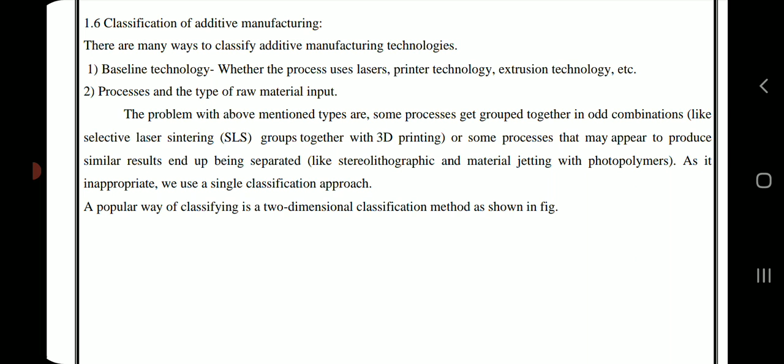As this is inappropriate, we use a single classification approach. A popular way of classifying is a two-dimensional classification method, as shown in the figure.

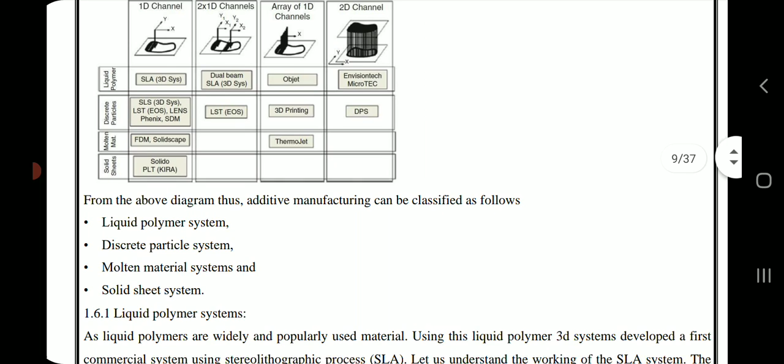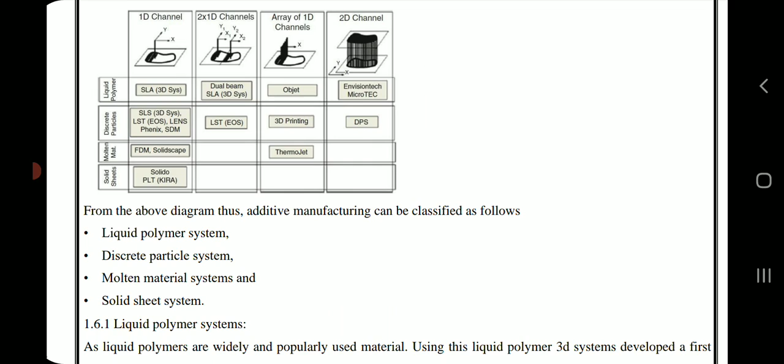From the above figure diagram, additive manufacturing can be classified as follows: liquid polymer systems, discrete particle systems, molten material systems, and solid sheet systems.

Liquid polymer systems: liquid polymers are a widely and popularly used material. Using this liquid polymer, 3D Systems developed the first commercial system using the stereolithographic process.

Let us understand the working of the SLA system. The detailed working principle of SLA is explained below.

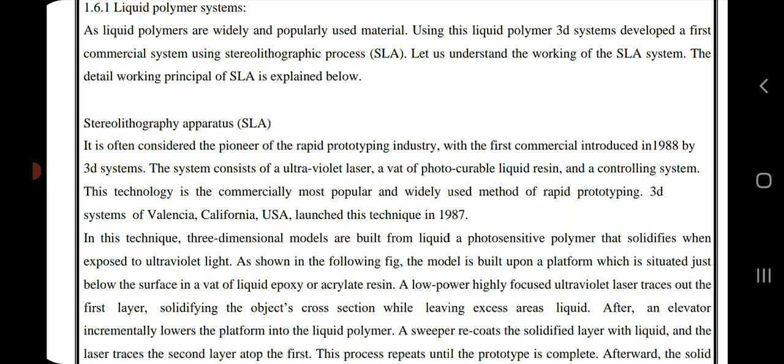Stereolithography apparatus, SLA. It is often considered the pioneer of the rapid prototyping industry, with the first commercial system introduced in 1988 by 3D Systems.

The system consists of an ultraviolet laser, a vat of photocurable liquid resin, and a controlling system.

This technology is the commercially most popular and widely used method of rapid prototyping. 3D Systems of Valencia, California, USA launched this technique in 1987.

In this technique, three-dimensional models are built from liquid, a photosensitive polymer that solidifies when exposed to ultraviolet light.

As shown in the following figure, the model is built upon a platform which is situated just below the surface in a vat of liquid epoxy or acrylate resin.

A low power, highly focused ultraviolet laser traces out the first layer, solidifying the object's cross section while leaving excess areas liquid.

After an elevator incrementally lowers the platform into the liquid polymer, a sweeper recoats the solidified layer with liquid, and the laser traces the second layer atop the first.

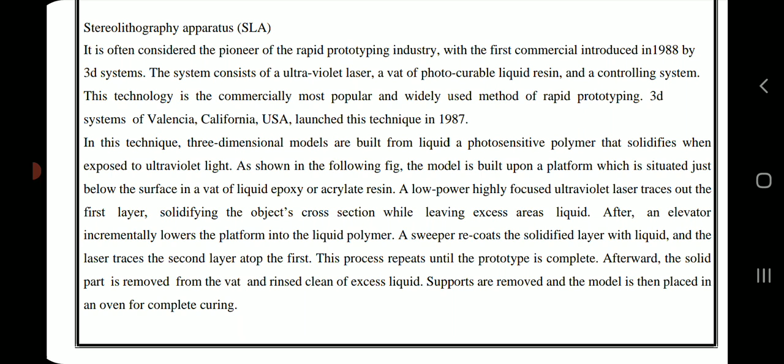Afterward, the solid part is removed from the vat and rinsed clean of excess liquid. Supports are removed and the model is then placed in an oven for complete curing.

Advantages: the SLA process builds complex geometry parts which cannot be produced by a conventional manufacturing process. High quality surface finish can be achieved, and a clear model with good resolution can be achieved.

Applications: it is used to produce parts with very fine features and high quality visualization models, fit and functional parts for assembly, and models used for flow visualization and stress analysis.

It is used for manufacturing medical models and for manufacturing parts for tooling and vacuum casting.

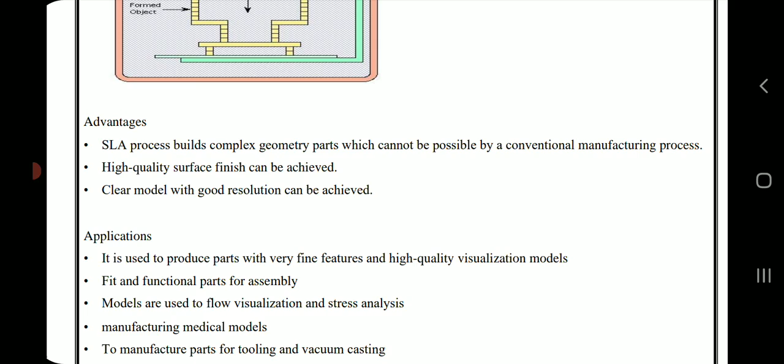Discrete particle systems, also known as powder based systems. Here, powders are graded into a uniform particle size and shape with narrow size distribution.

Finer particles are better and give good results; if too small powders are used, then controlling the distribution and dispersion of particles becomes difficult.

In 1D approach, using a laser we produce thermal energy in a controlled manner so the temperature increases to melt the powder.

The polymer powders used should exhibit thermoelastic behavior so that they can be melted and remelted to permit bonding of one layer to another.

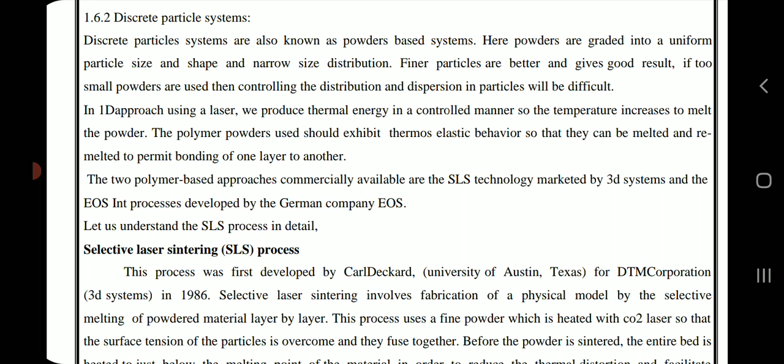The two polymer based approaches commercially available are the SLS technology marketed by 3D Systems and the EOS process developed by the German company EOS. Let us understand the SLS process in detail.

Selective laser sintering, SLS, process. This process was first developed by Carl Deckard at the University of Austin, Texas, for DTM Corporation, later 3D Systems, in 1986.

Selective laser sintering involves fabrication of a physical model by the selective melting of powdered material layer by layer.

This process uses a fine powder which is heated with a carbon dioxide laser so that the surface tension of the particles is overcome and they fuse together.

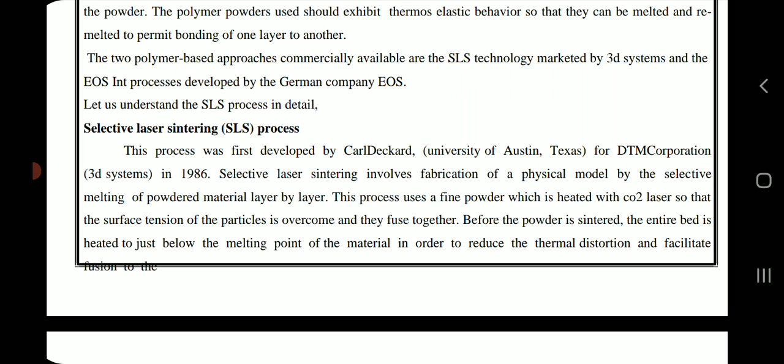Before the powder is sintered, the entire bed is heated to just below the melting point of the material, in order to reduce thermal distortion and facilitate fusion to the previous layer.

The geometry of the object is created as CAD data, and CAD files are transferred into an STL file system. The STL file is then sliced and drawn as one cross section at a time.

The laser selectively fuses powdered material by scanning cross sections of the object on the surface of a powder bed. After each cross section is scanned, the powder bed is lowered by one layer thickness.

A new layer of material is applied on top and the process is repeated until the part is completed. Compared to other processes, a relatively wide range of powder materials can be used in this process.

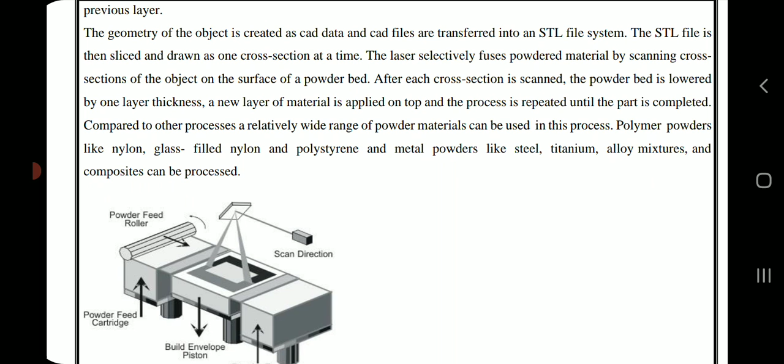Polymer powders like nylon, glass filled nylon, and polystyrene, and metal powders like steel, titanium alloy mixtures, and composites can be processed.

Advantages: a wide range of materials can be used, post curing is not necessary, unfused powder acts as a support, and the support material can be easily removed.

Applications: fit and functional prototypes for mechanical and thermal tests. Small plastic parts can be used for rapid tooling applications like injection molding, can be used for soft tooling and short run production.

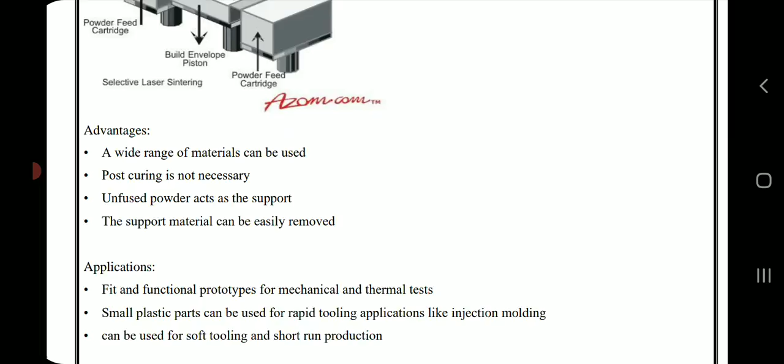Molten material systems, also called solidly based systems, are characterized by a preheating chamber that raises the material temperature to melting point so that it can flow through a delivery system.

The most well known method for doing this is the fused deposition modeling (FDM) material extrusion technology developed by the US company Stratasys. In this technique, filaments of heated thermoplastic are extruded from a tip that moves in the XY plane.

FDM builds plastic models by extruding a semi-molten filament through a heated nozzle in a prescribed pattern onto a platform. The nozzle is moved over the platform in the required geometry of the part, which is driven by the CAD data.

The platform is maintained at a lower temperature so that the thermoplastic quickly hardens. After the platform is lowered, the extrusion head deposits a second layer upon the first layer. The process is repeated until the required object is built. Supports are built along the way, fastened to the part with weaker material.

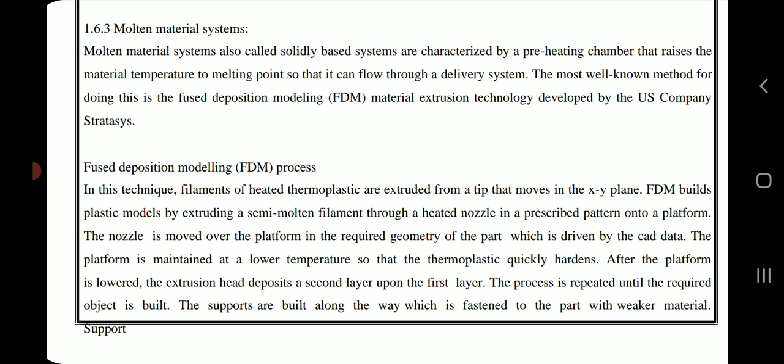Support structures are fabricated for overhanging geometries and are later removed by breaking them away from the object. A water soluble support material which can simply be washed away is also available.

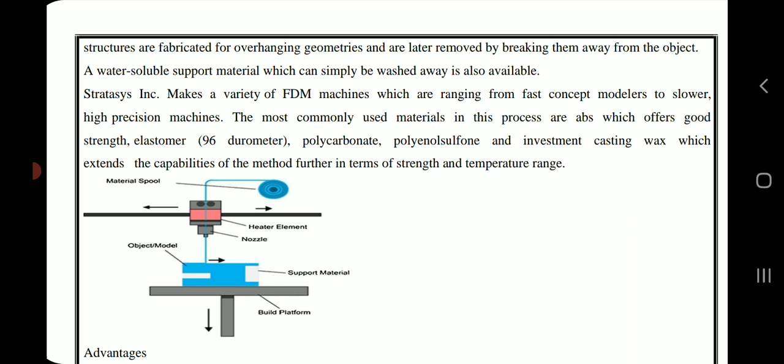Stratasys makes a variety of FDM machines ranging from fast concept modelers to slower high precision machines. The most commonly used materials in this process are ABS, which offers good strength, elastomer 96 durometer, polycarbonate, polyphenylsulfone, and investment casting wax, which extends the capabilities of the method further in terms of strength and temperature range.

Advantages: high strength and cost effective process. The process offers multiple materials with colors and greater strength. Post curing is not required. It is a fast process with quick changing of material.

Applications: fit, form, and functional prototypes for testing. Rapid toolings like investment casting and injection molding. Prototypes constructed for production materials. Quality parts with high stability and durable parts.

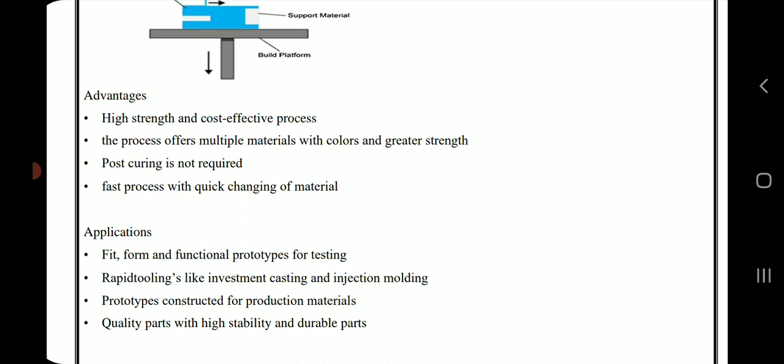Solid sheet systems. This is an obsolete technology which is not widely used nowadays. An example of the earliest solid sheet systems is the Laminated Object Manufacturing (LOM) system from Helisys USA.

Here a laser is used to cut profiles from sheet paper supplied from a continuous roll, which forms layers of the final part.

Laminated Object Manufacturing (LOM) process. This process was developed by Helisys of Torrance, California, USA in 1998, which is a layer additive process. In this process, the material consists of paper laminate, which is coated with thermoplastic adhesive and rolled up on spools.

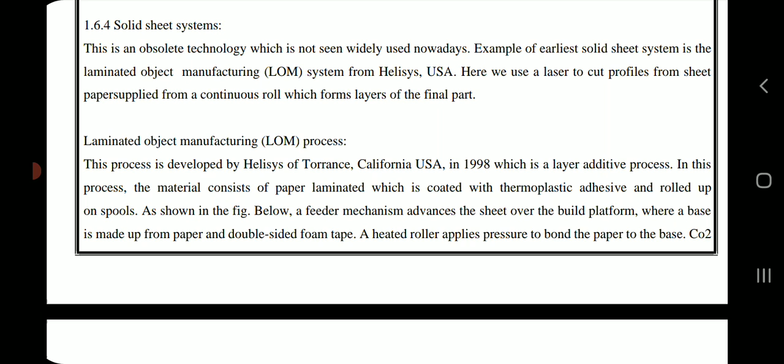As shown in the figure, a feeder mechanism advances the sheet over the build platform where a base is made from paper and double-sided tape. A heated roller applies pressure to bond the paper to the base.

A carbon dioxide laser traces the outline of the CAD data fed into the computer. After the laser cutting is completed, the platform moves down and a fresh sheet of laminated paper is rolled on. The process is repeated as needed to build the part.

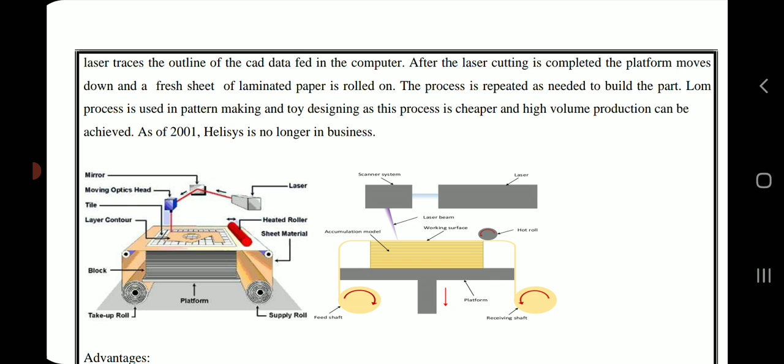The LOM process is used in pattern making and toy designing, as this process is cheaper and high volume production can be achieved. As of 2001, Helisys is no longer in business.

Advantages: the support structure is not required. It is fast, cheap, and a scalable process when compared to SLA and SLS processes. Material cost is low, and various materials like paper, plastics, and ceramics can be used.

Multiple parts in large volume can be built. The building can be paused at any point in time.

Applications: can be used as precise patterns for secondary tooling processes such as sand casting and vacuum casting. Parts are used where high tolerances are not critical. Parts can be used in the conceptual design area, used as a visual model.